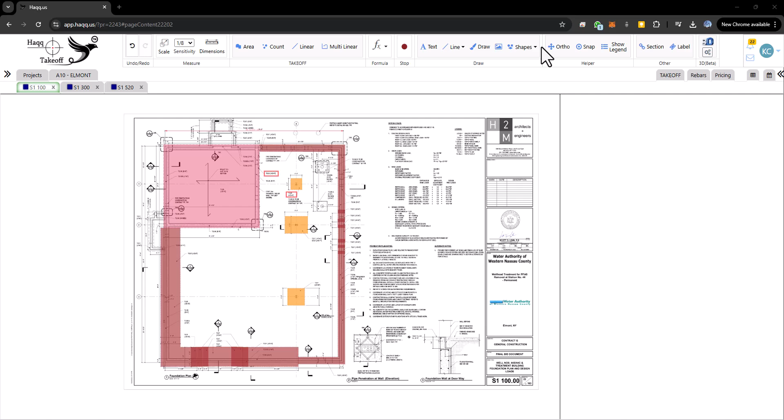In this tutorial, we will add concrete walls to our takeoff. Let's begin with this square area. The walls are sitting on the mat slab, so the bottom elevation of the wall is minus 12 feet, and the top elevation is plus 9 inches, making the wall height 12 feet 9 inches. The exterior wall thickness is 1 foot 4 inches, and the interior wall thickness is 1 foot.

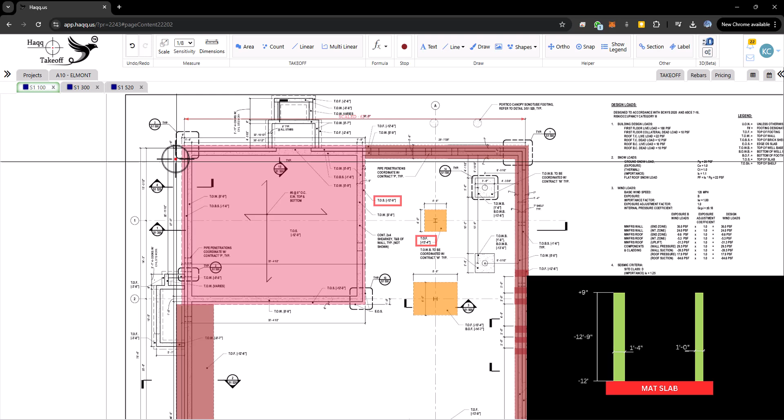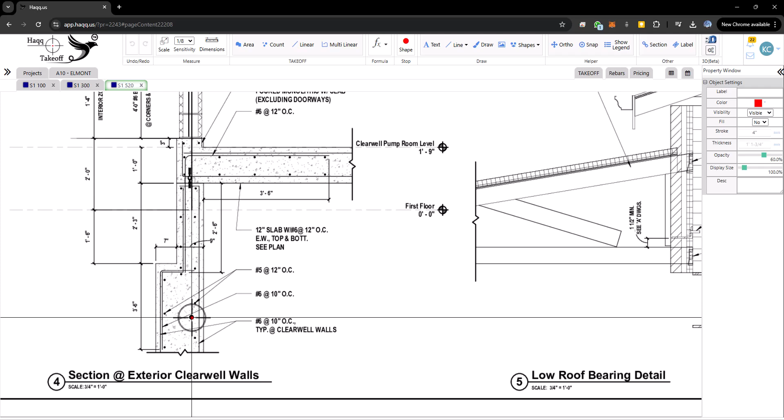An important note, let's take a look at the building section shown in S1 520. The exterior walls have brick shelves. However, I will not deduct concrete for the brick shelves. Instead, I will calculate the walls as having the same thickness all the way up. Later, we will add 7-inch thick rigid insulation to account for the brick shelf framing. Filling inside the concrete form with rigid insulation will be a lot faster than framing the brick shelf with plywood.

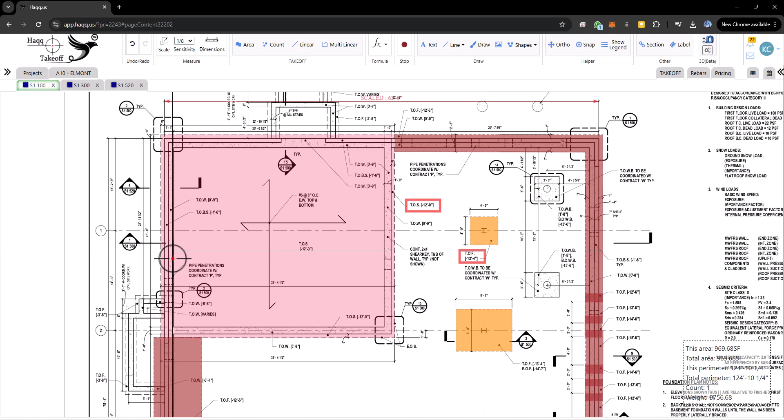Now, let's go back to S1 100 and start with the exterior walls. Walls are linear elements, so we'll use the linear tool. In the linear element form, name the wall 16-inch thick wall, 12 feet 9 inches high. Select a color. I always use green tones for walls. Add a new group and name it walls, then click OK.

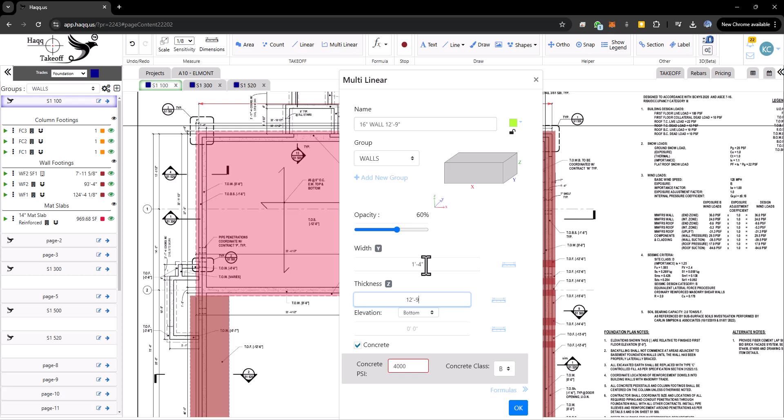Enter the wall thickness as 16 inches, the wall height as 12 feet 9 inches, and the bottom elevation of wall, which is top of mat slab, minus 12 feet. Verify that the concrete PSI and class values are correct, then press OK. You will now see a new group created with a new wall element listed in the left panel.

Now, simply start clicking around the 16-inch wall. Don't worry if you can't align it perfectly with the wall in the drawing. You can always edit it later to make adjustments. Once you're done, press Escape to finish. Next, let's check the 3D model. You'll see that our building is starting to come together with the walls in place.

Now, let's go back and do the takeoff for the 12-inch interior walls. The interior walls have the same properties as the exterior walls, with the only difference being that the thickness of the interior walls is 12 inches. Let's click on the linear tool again. This time, name the wall 12-inch thick wall, 12 feet 9 inches high.

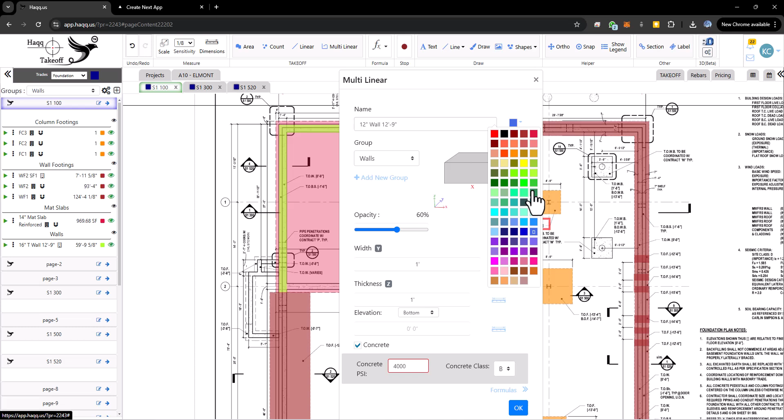The group is already selected as walls, and the default thickness is set to 12 inches. Enter 12 feet 9 inches for the height of the wall and negative 12 feet for the bottom elevation. Then click OK. Next, start clicking along the wall. Once you're done, press Escape to finish. In the left panel, you'll see both 12-inch and 16-inch walls listed along with their lengths.

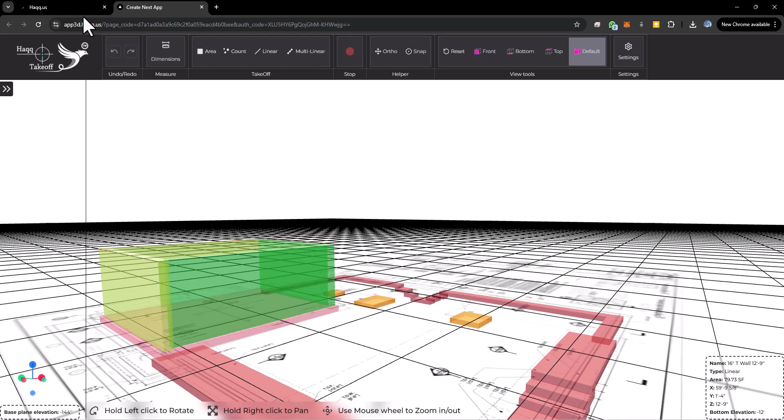Now, let's check the 3D model again. The square-shaped walls are already in place nicely. Next, let's go back and add reinforcing for these walls. First, let's check the wall detail in S1300. Horizontal reinforcing is number 5 at 12 inches on center on each face for both exterior and interior walls. Vertical rebar and dowels are number 6 at 10 inches on center on each face.

For exterior walls, the outside rebar has a hook under the brick shelf. Since we are eliminating brick shelves, we will consider a hook at the top of the wall. Interior walls have both verticals going all the way up to top of wall without hooks. Also, both interior and exterior walls have top dowels number 6 at 12 inches on center extending into the top framed slab.

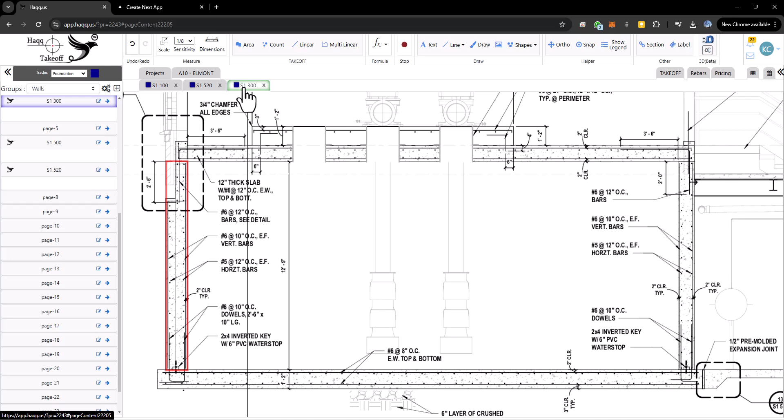To make this process more efficient, I'll split the screen so that the wall detail from S1300 is visible on the right side of the window. This way, there's no need to switch back and forth between the pages to check the reinforcing details. Navigate to the S1300 tab, right-click on it, and select Split Right. Resize the right panel to make it smaller, leaving more room for S100 on the left side.

Zoom in on the specific wall detail you need in S1300. Make sure that the S100 tab is highlighted as the active window on the left side. Now you're ready to continue working with the reinforcing details while referencing the wall details conveniently. Left-click on the exterior wall, then click Rebar and select Add Rebar. If the rebar form overlaps the wall section, move it into a position where you can see the wall section below.

Let's start with horizontal bars. First, we need to set the direction, range, and location. The direction of the horizontal rebar will be the X direction, as horizontal bars run continuously along the length of the wall, as shown in the image on the right side. The range will be Z, because the horizontal bars are stacked on top of each other. Horizontal bars are considered top bars, since they have more than 12 inches of concrete beneath them. So select top as location.

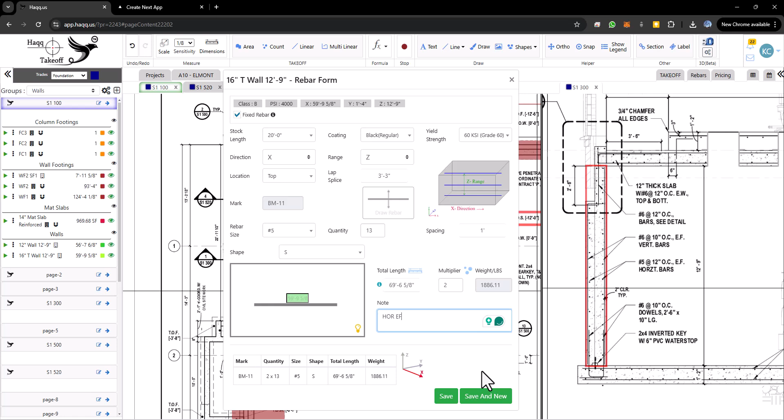Now, let's add the rebar properties. The spacing of the horizontal bars is 12 inches on center, so there's no need to change the spacing. The size is number 5, so update the rebar size to number 5. The shape is straight, so S is correct. Since the rebar is placed on each face of the wall, change the multiplier to 2. Add a note for yourself: horizontal each face. Finally, click Save and New.

We are not done with horizontal bars yet. We still need to add corner bars. Corner bars connect each side of the wall at the corner. In the corner bar detail, the red lines represent the horizontal rebars on each side of the corner, and the blue L-shaped bars are the corner bars. Since the horizontal bars are placed on each face, we need one corner bar for each face.

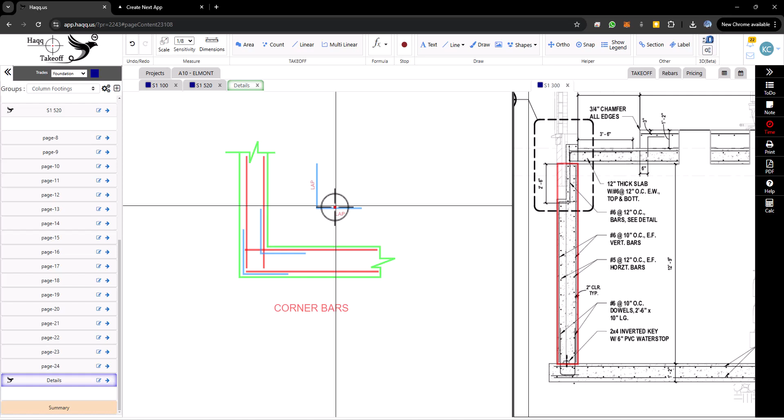The leg value of the corner bars will be equal to the lap splice length for each side. Now, let's go back to S100 and add the corner bars. This time, left-click on the exterior walls, then click Rebar and select Show Rebars. This table displays all the rebar for the selected element. We will return to this later to copy and paste rebar.

Click the plus sign at the bottom left to open the rebar form, and repeat the same process we did for the horizontal bars. Set the direction to X and the range to Z. Check the image to ensure the settings make sense, which looks correct now. Then, select top bar as the location. Spacing of rebar 1 foot is good, so there's no need to change it. Update the rebar size to number 5.

Now, we come to a very important advanced part of Haqq Takeoff. Selecting the shape of rebar. Click the drop-down menu and scroll to see all the rebar shapes based on ACI standards. You can select any shape and start entering values for each section of the shape. Alternatively, you can type the shape name directly. These names follow ACI standard shapes.

Haqq Takeoff also includes shortcut keys for common shapes. For example, T is for ties, L is for links, and U is for U-bars. These shortcut keys are listed next to the shape numbers. For instance, Shape 1's shortcut key is H, and Shape 3's shortcut key is V. For our corner bars, type L to select the shape. Next, we need to enter the values for A, B, and C. Since corner bars have 2 legs, we don't need to enter a C value.

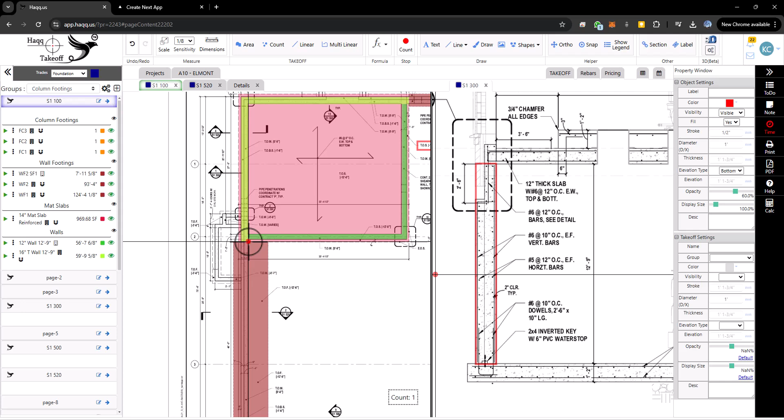Now, set the multiplier to reflect the number of corner bars needed. Use the Count tool next to the multiplier and click on each corner for each face of the horizontal bars. Press Escape to finish Count tool. Since there are 4 corners per face, and bars are on 2 faces, the total will be 8 corner bar locations. Add a note for yourself. Corner bars, each face. Finally, click Save.

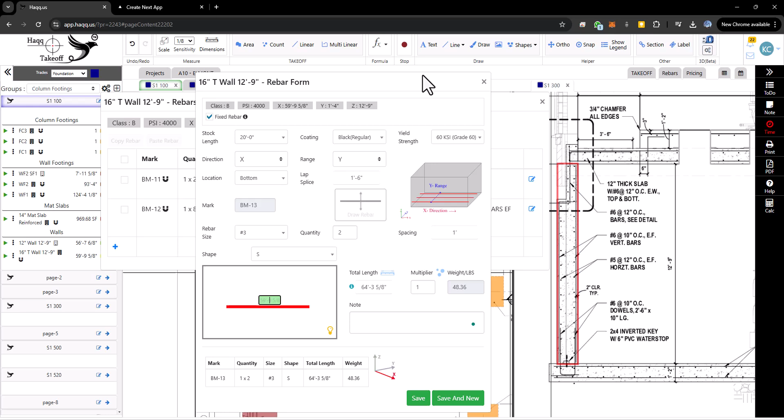So far, we've completed the horizontal reinforcing. Now, let's move on to entering the vertical bars and dowels. Click the plus sign again to add more rebar. For vertical bars, the direction will be Z and the range will be X. Take a look at the image on the right side to confirm that this setup makes sense. This time, the location of the rebar will remain at the bottom since there isn't 12 inches of fresh concrete below. Check the vertical bar properties in the split screen detail on the right.

The vertical bars are number 6 at 10 inches on center on each face. Update the spacing to 10 inches and change the rebar size to number 6. The shape of the rebar is straight, and the length is automatically calculated. Since the vertical bars are on each face, set the multiplier to 2. Add a note for yourself. Verticals each face. Then click Save and New.

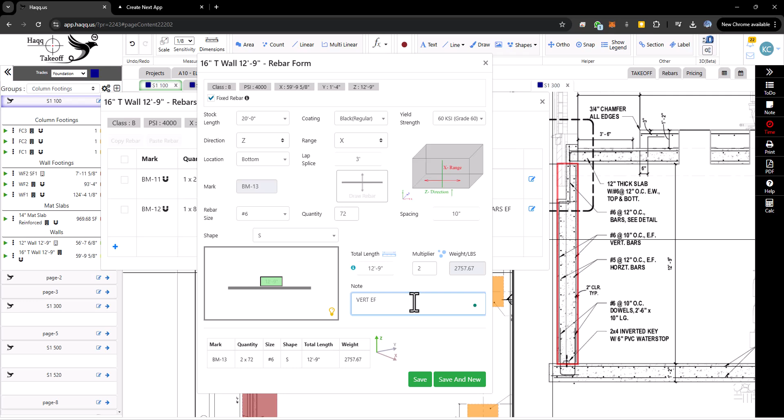Dowels are similar to vertical bars. Set the direction to Z and the range to X, with the location remaining at the bottom. Change the spacing to 10 inches and select number 6 for the rebar size. Choose shape 2 for dowels. For dowels, one leg will have a standard hook, and the vertical leg will have a lap splice plus the thickness of the mat slab.

For the A value, press A for automatic entry of the standard hook. Press Tab, and you'll see 1 foot automatically entered using the shortcut key A. For the B value, the lap splice is 3 feet plus 1 foot 2 inches for the mat slab thickness. So enter 4 feet 2 inches. Set the multiplier to 2, since dowels are on each face as well. Add a note for yourself. Dowels each face. Finally, click Save.

The last rebar to add is the U bar at the top, number 6 at 12 inches on center, which extends into the framed slab. When selecting the direction for this bar, don't get confused. It is similar to the bottom dowels, and its count matches the vertical bars. So, we'll set the direction as Z. Click the plus sign again, select Z for the direction, and X for the range. The location stays as bottom. The spacing of 12 inches is fine, so no changes are needed there. Change the rebar size to number 6.

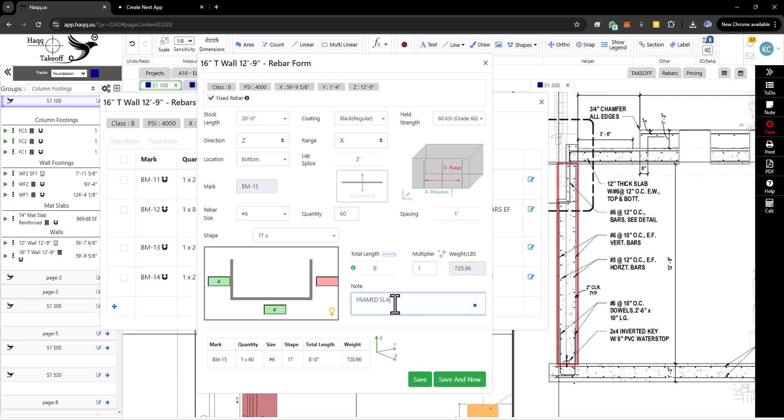Then type U to select the U shape. The leg value for this rebar is specified in the section as 3 feet 6 inches plus 6 inches for the curb, which totals 4 feet for each leg. Enter 4 feet for both A and B values. The multiplier remains as 1. Add a note for yourself, framed slab dowels. Then click Save. We are now finished adding rebar to the exterior walls.

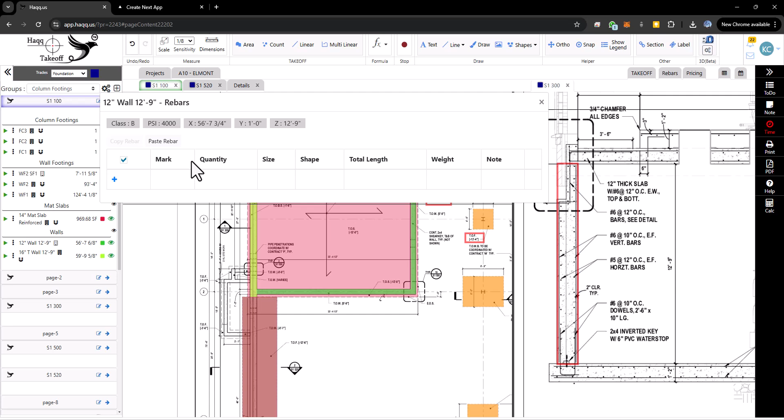Since the interior walls have the same reinforcement, select all the bars and click Copy. Close this table, navigate to the interior walls, right-click, select Rebar, and choose Show Rebars. With the rebar copied to memory, the Paste option is available. Click Paste. You can paste the rebar for walls with different heights and lengths, as Haqq Takeoff will automatically adjust the values.